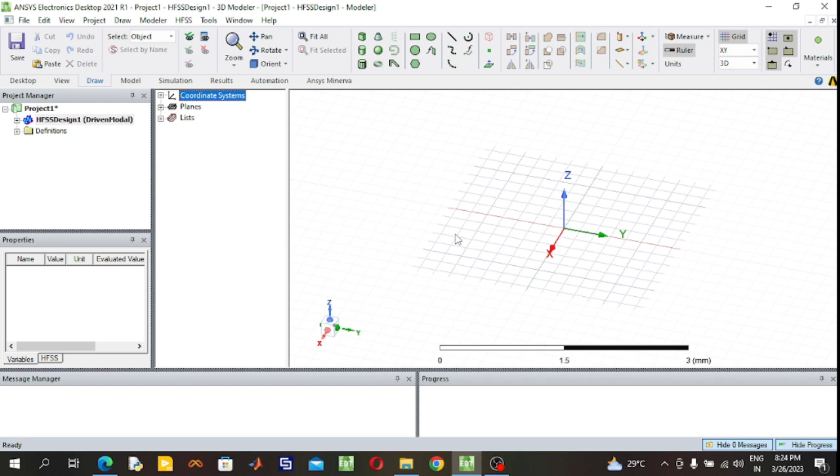In my previous videos, I already designed a half-wave dipole antenna at a 2.4 GHz operating frequency. Now in this video, I am going to design a folded dipole lambda by 2, folded half-wave dipole antenna design and simulation results.

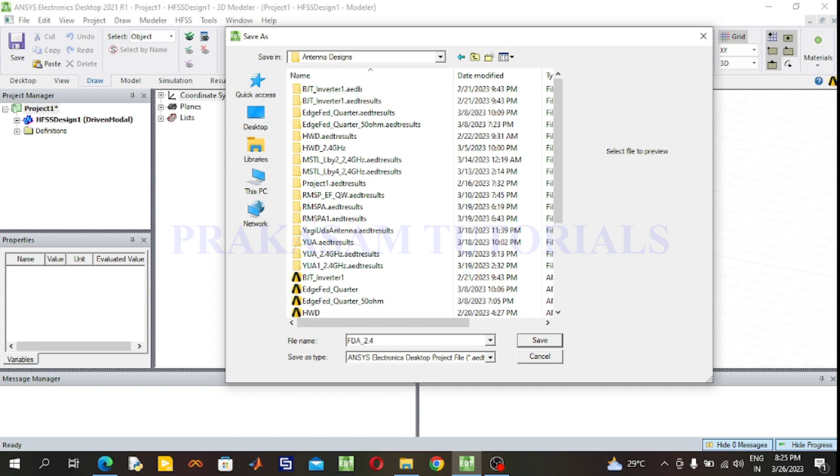First save the project: right click on the project, save as. Give the file name. Here my file name is FDA, folded dipole antenna underscore 2.4 gigahertz. So this is my file name. So my project is successfully saved.

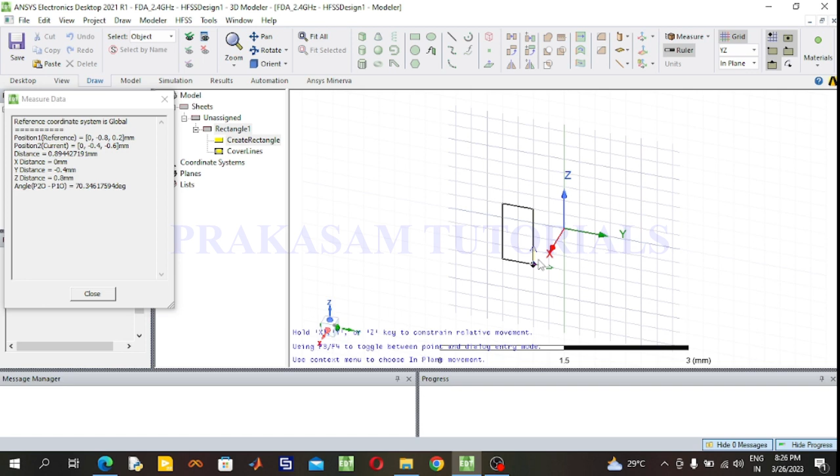So first select the YZ plane. First draw the rectangular port. Select the rectangular sheet. Draw the rectangular sheet in the plane. Give the dimensions of the rectangular sheet and rename the rectangle to port, and change the dimensions of the rectangular sheet. The calculations of the half-wave dipole antenna were already explained in my

previous video. At 2.4 GHz operating frequency, the wavelength is 125 mm and lambda by 2 is 62.5 mm, and upper radiating element length is 31.25 mm, and radius of the dipole is lambda by 120. So lambda by 120 is 1.04 mm.

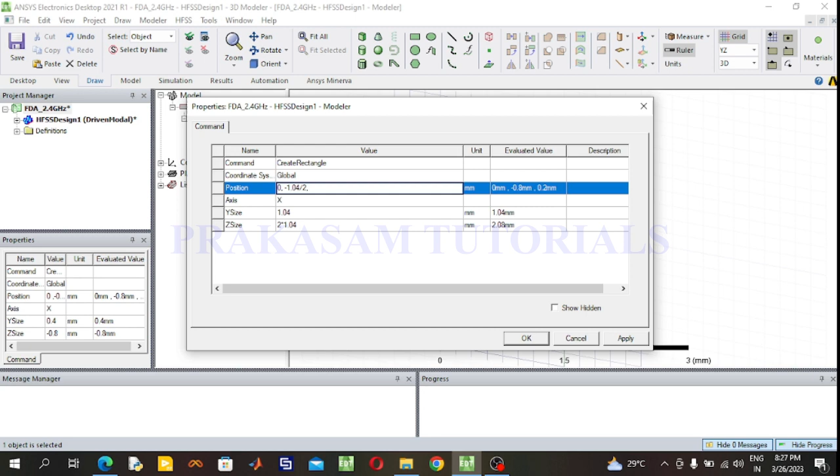So Y size is 1.04 mm, that is the dipole radius, and Z size is the gap, 2 times the dipole radius. X position is 0, Y position is half of the Y size value, minus 1.04 by 2, and Z position is half of the Z size value, minus 1.04 mm. So click the OK button. So this is the rectangular port.

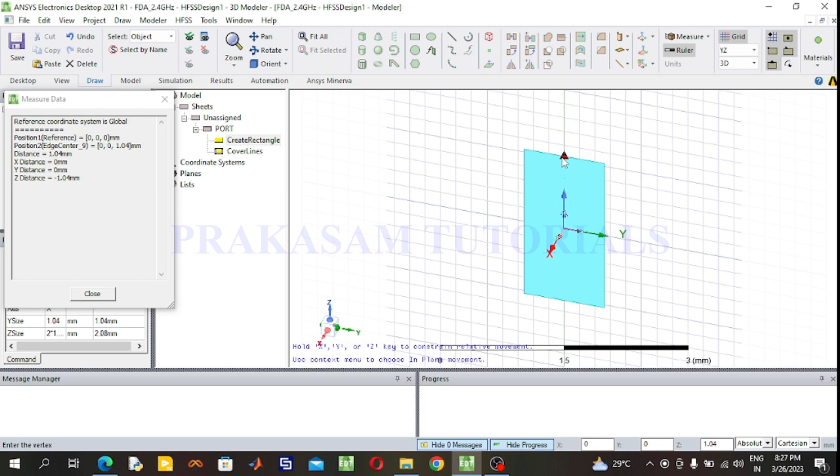Next select the line, draw the line from the upper port to the lower port. This is the rectangular port, this is the upper port, this is the lower port. Click on the upper port, move the mouse upward, click that position, move the mouse horizontally and click this position. Move the mouse downward, click this position, move the mouse leftward, click this position and move the mouse to the lower port of the rectangle. Double click on that position.

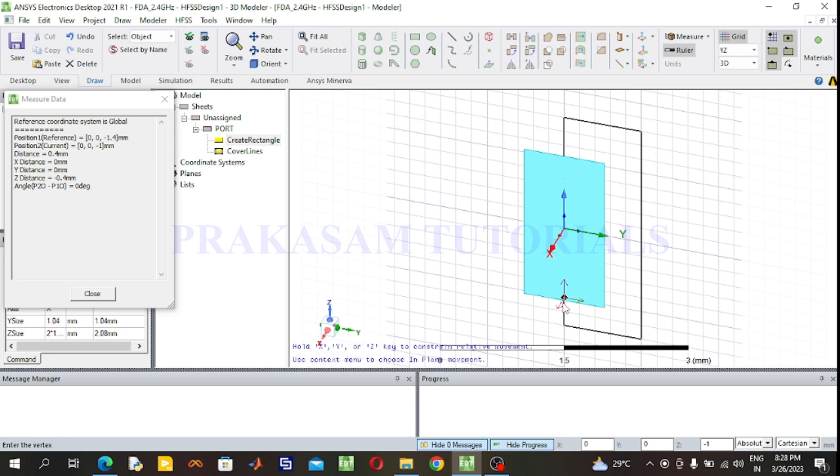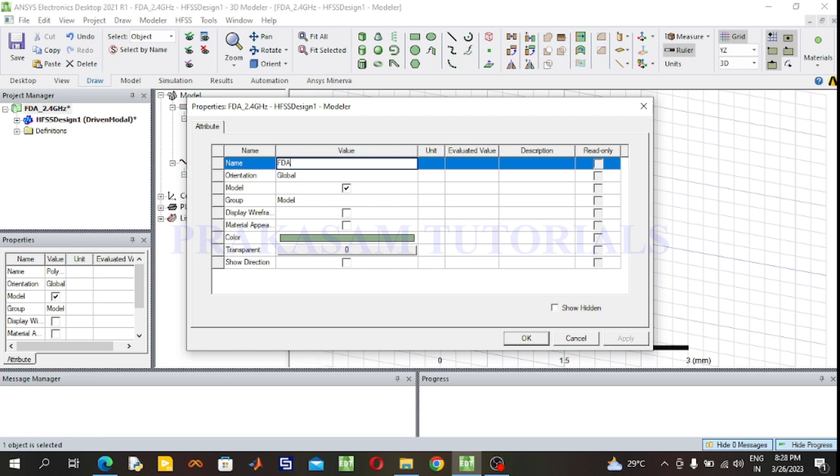So this is the line. After that, rename polyline 1: double click on polyline 1 and rename it FDA, folded dipole antenna. Next change the dimensions of the antenna. This is create line 1, create line 2, create line 3, create line 4, and create line 5.

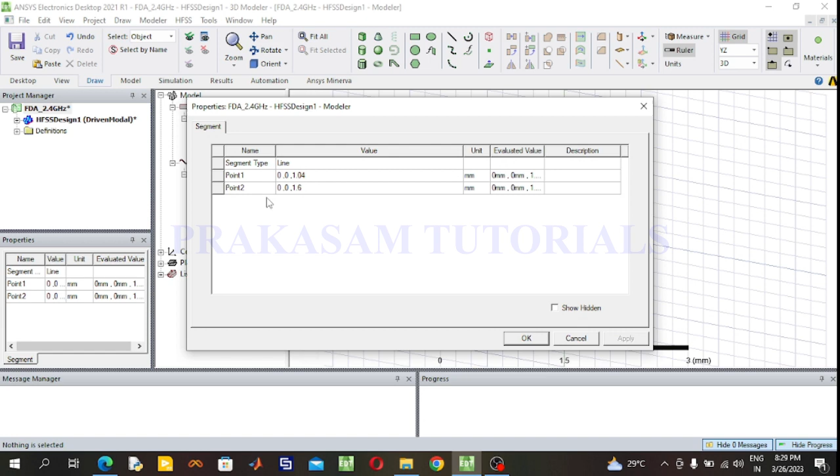Now change the dimensions of create line 1 to create line 5. Double click on create line 1. This is point 1, this is point 2. The height of the rectangular port is 1.04, gap is 2 times 1.04, and from origin to this height is 1.04. So point 1 is 0, 0, 1.04, and point 2 is 0, 0, height of the dipole.

At 2.4 gigahertz operating frequency, the wavelength is 125 mm, and lambda by 2 is 125 by 2, 62.5 mm. Upper radiating element length is lambda by 4, so 125 mm by 4 is 31.25 mm, subtracting the gap: lambda by 4 minus gap. Gap value is 2 into 1.04. So 29.1 mm is the upper radiating element length.

So now point 2 is 0, 0, upper radiating element length 29.1 mm minus 1.04 mm. Press the OK button. Those are the create line 1 dimensions. Next change the dimensions of create line 2. Double click on create line 2. Point 1 dimensions are 0, 0, 29.1 minus 1.04 mm, and point 2 dimensions are,

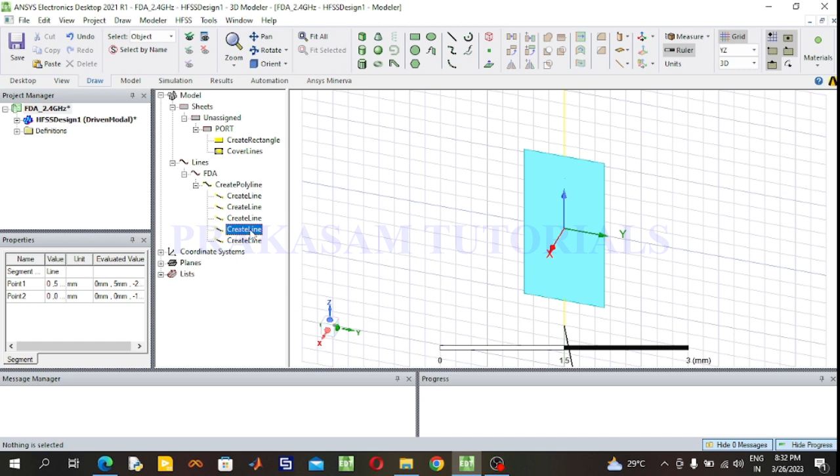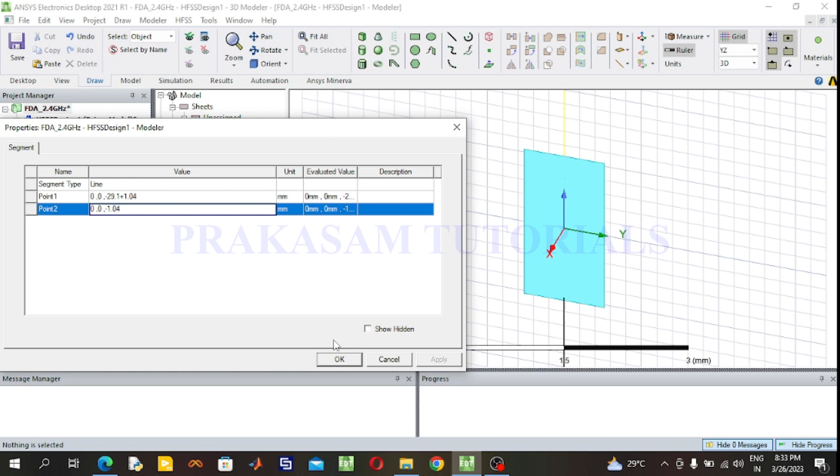Next change the dimensions of create line 4. Double click on create line 4. Point 1 dimensions are 0, 5, minus 29.1 plus 1.04, and point 2 dimensions are 0, 0, minus 29.1 plus 1.04 mm. Press the OK button. Next change the dimensions of create line 5. Double click on create line 5. Point 1 dimensions are 0, 0, minus 29.1 plus 1.04 mm, and point 2 dimensions are 0, 0, minus 1.04 mm. Press the OK button. So now select the FDA.

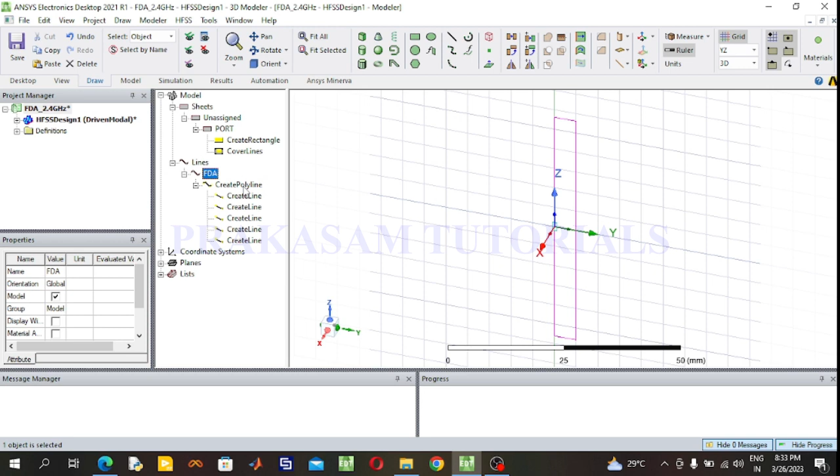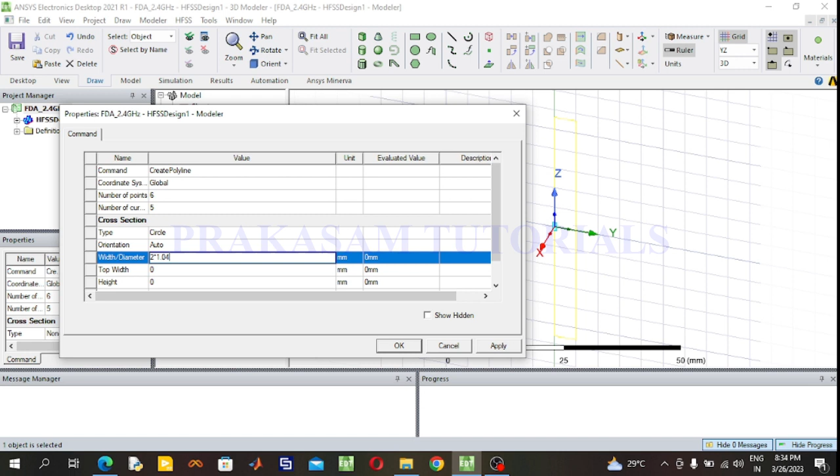This is the folded dipole antenna. So now change the width of the line. Double click on this create polyline. So now here the type is none. I am selecting the type as circular, and the width of the dipole is 2 times the dipole radius. So 2 into, now here the dipole radius is 1.04 mm,

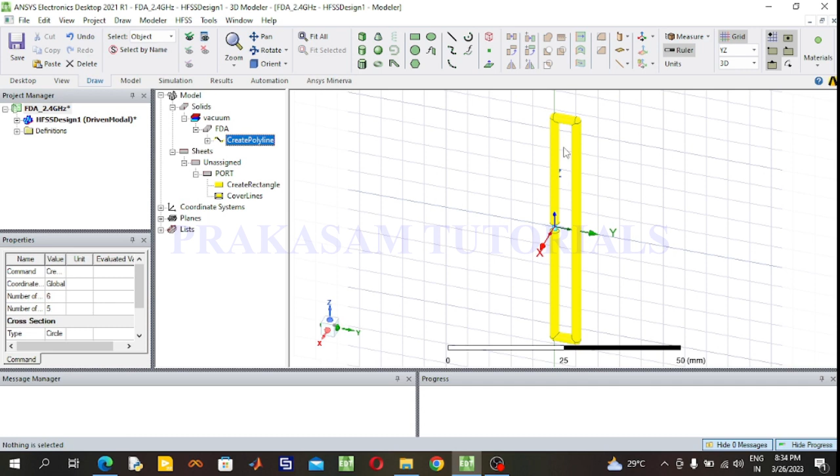and bend type is corner. I am selecting curved shape. Press the OK button. So this is the folded dipole antenna. So now change the type of the material. Double click on the FDA. Now here the material is vacuum. I am selecting PEC material, perfect electric conductor material. So press the OK button.

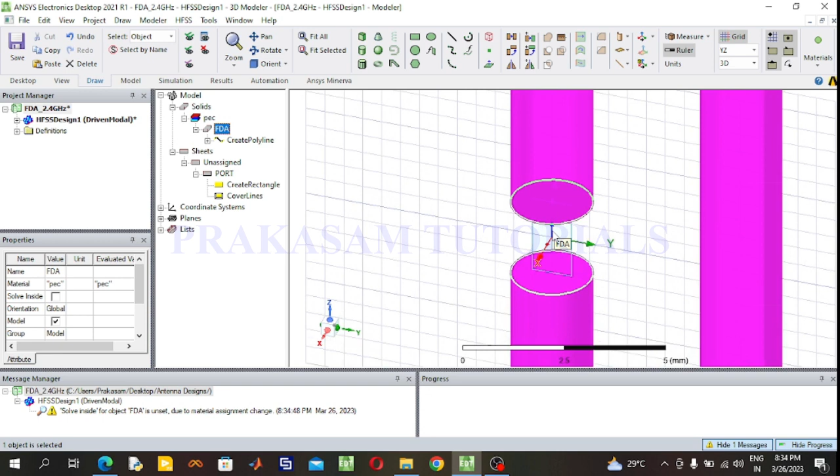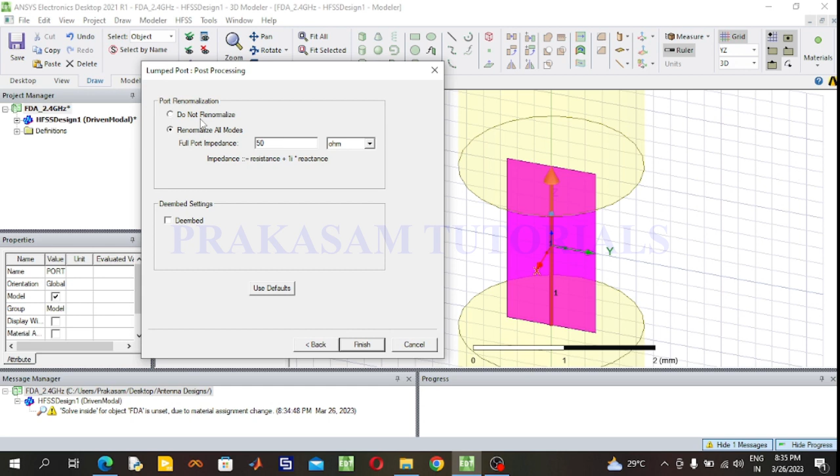So now assign the lumped port excitation. Select port, right click on the port, go to assign excitation, select lumped port, and the full port impedance of the folded dipole antenna is 300 ohms. Press the OK button. Draw the new line integration from lower port to the upper port. Press the OK button. Select Don't Renormalize. Press Finish button. So lumped port excitation is successfully assigned.

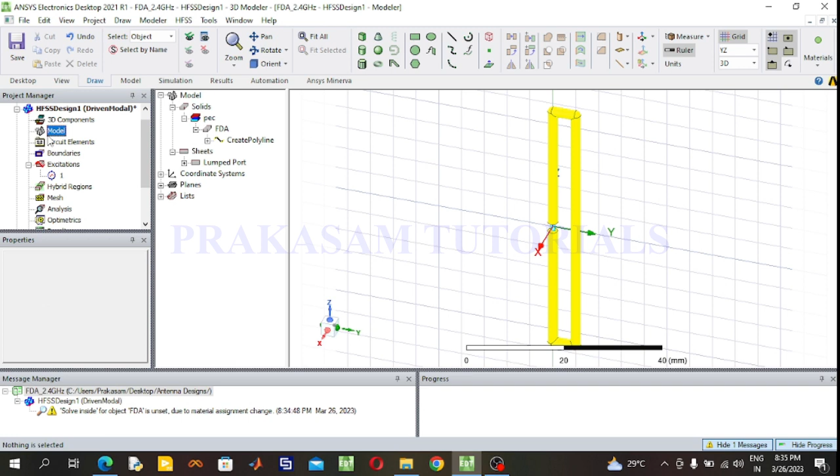Select the fit all. Now select the box, radiation box. So now here I am selecting open model. In the project manager, right click on the model, select create open region. Now here my operating frequency is 2.4 GHz. Type the operating frequency value, press the OK button, fit all. So this is the 3D structure of the folded dipole antenna.

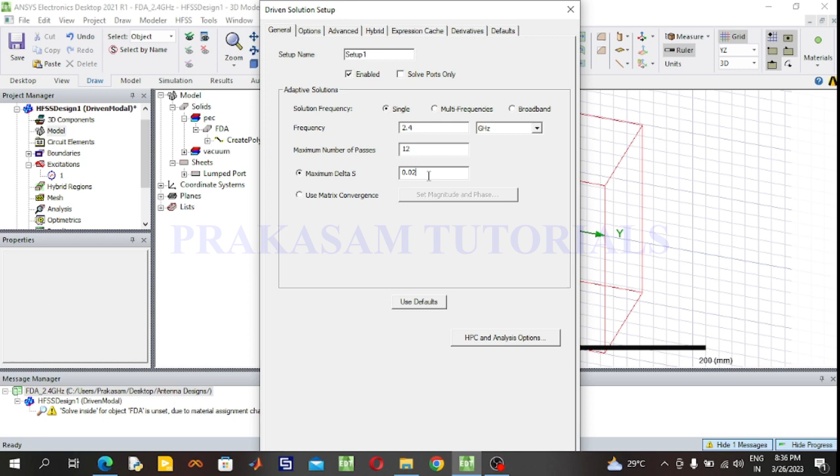Now set the analysis setup. Go to HFSS, analysis setup, add solution setup, select advanced. Now the operating frequency is 2.4 GHz. I am selecting maximum number of passes 12 and maximum delta S 0.02. So press the OK button, and the sweep type is fast, starting frequency is 1.2 GHz, ending frequency is 3.6 GHz and maximum number of points are 101. So press the OK button.

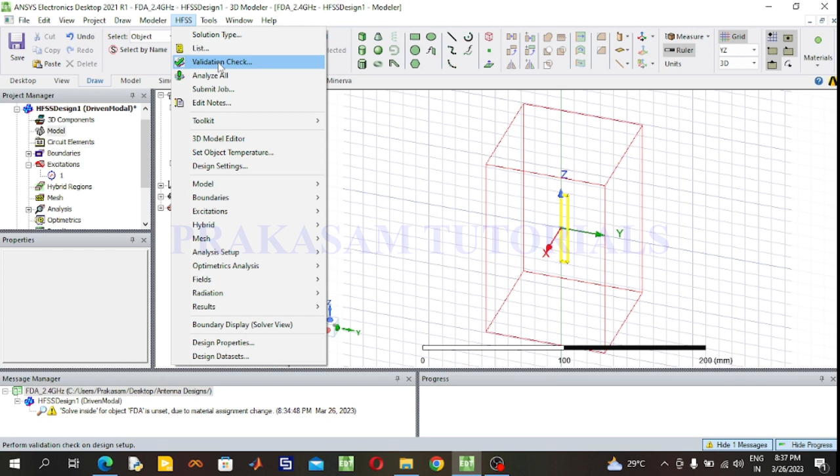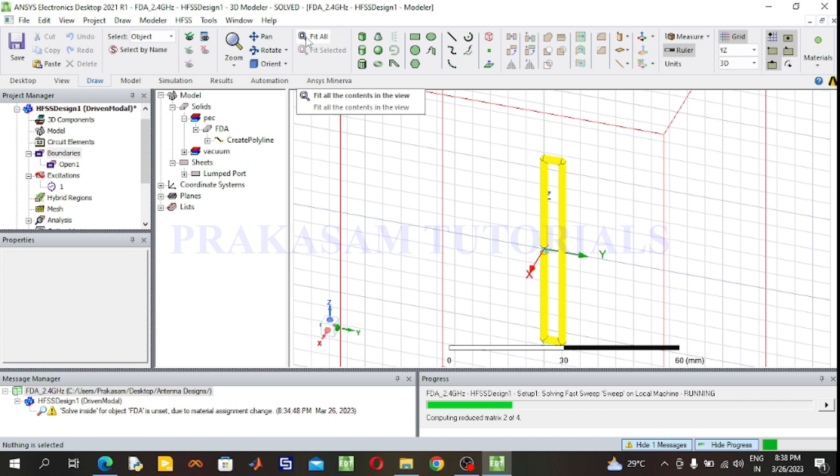Now check the validity. Go to HFSS, select validation check button. So design is successfully validated. Now start the simulation. Go to HFSS, select analyze all. Simulation is successfully completed. So now observe the results. First observe the S parameter value. Right click on the results. Create modal solution data report. Select rectangular plot, S parameter S11 in decibel. Click the new report.

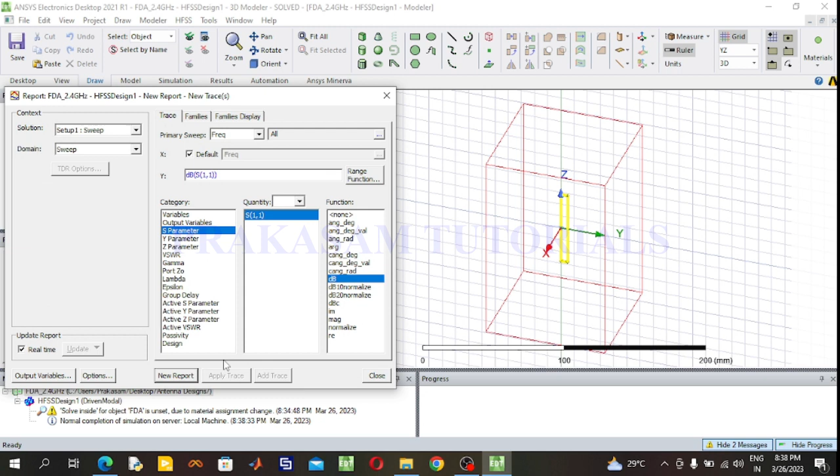So mark the designated operating frequency. My designated operating frequency is 2.4 GHz. At 2.4 GHz, the return loss value is minus 21.84 decibel. I will slightly change the height of the dipole so we will get a minimum return loss value. Now here the upper radiating dipole element length is 29.1 mm. I am changing the height of the upper radiating dipole element to 28 mm.

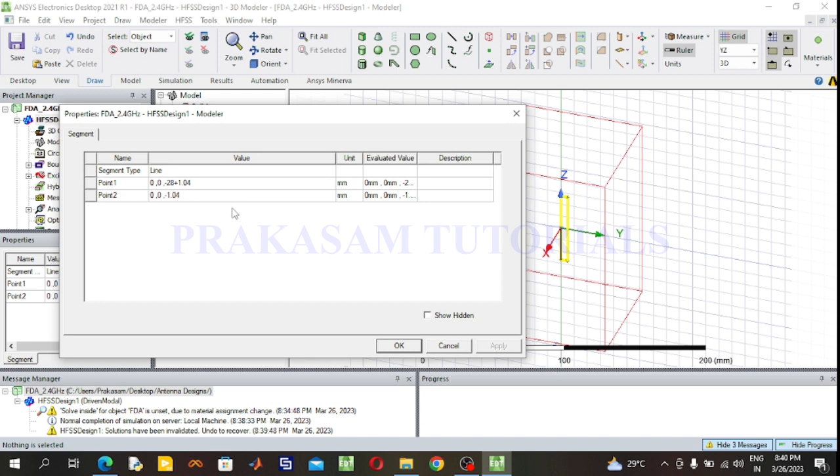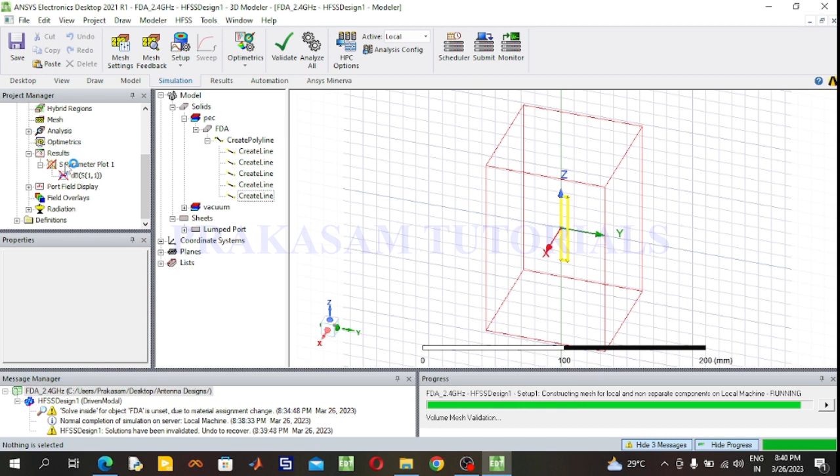So height of the dipole is changed. Now check the validity. Validate. So design is successfully validated. Now start the simulation. Click the analyze all button. So the S parameter value is updated. At 2.4 GHz operating frequency, the return loss value is minus 29.2426 decibel. This is a very good value. The folded dipole antenna at 2.4 GHz operating frequency is successfully designed.

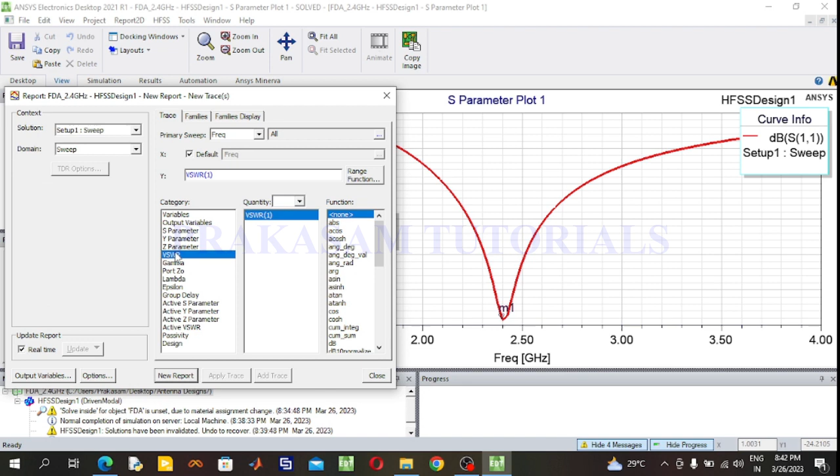Next, observe the VSWR value. Right click on the result. Create modal solution data report. Select the rectangular plot and select VSWR. Click the new report. So mark the designated operating frequency 2.4 GHz. At 2.4 GHz operating frequency, the VSWR value is 1.0715. So this is an excellent value.

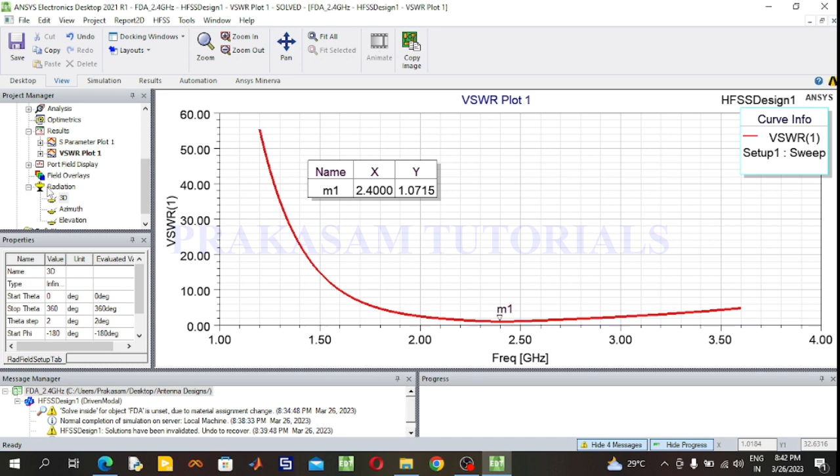Next, observe the far field results. So now here the 3D infinite sphere. Phi value is minus 180 to plus 180 and theta value I am selecting 360. Go to the results, right click on the results, go to create far fields report, select the radiation pattern and select the gain in decibel, select the family of the phi values. The family of phi values are all values, meaning minus 180 to plus 180.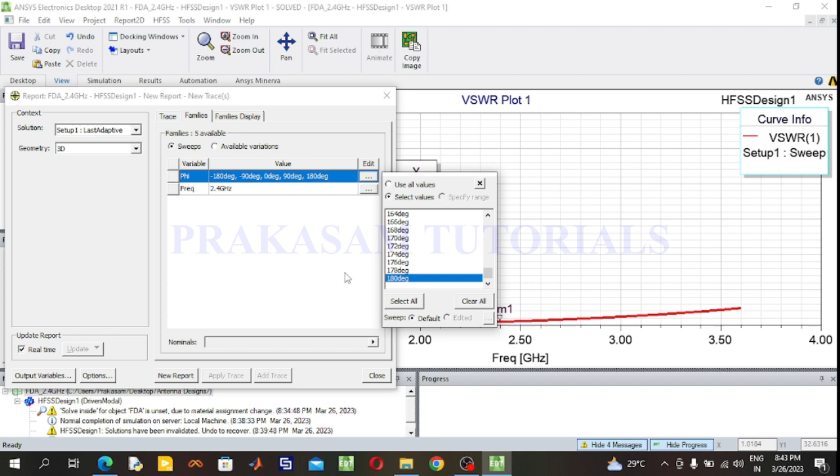Now here I am selecting the family of values minus 180, minus 90 degrees, 0 degrees, plus 90 degrees, plus 180 degrees. Click the new report. So this is the two-dimensional gain radiation pattern.

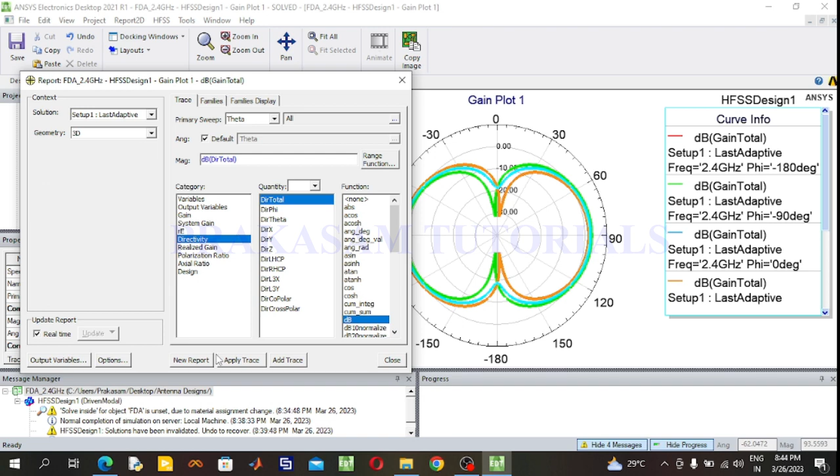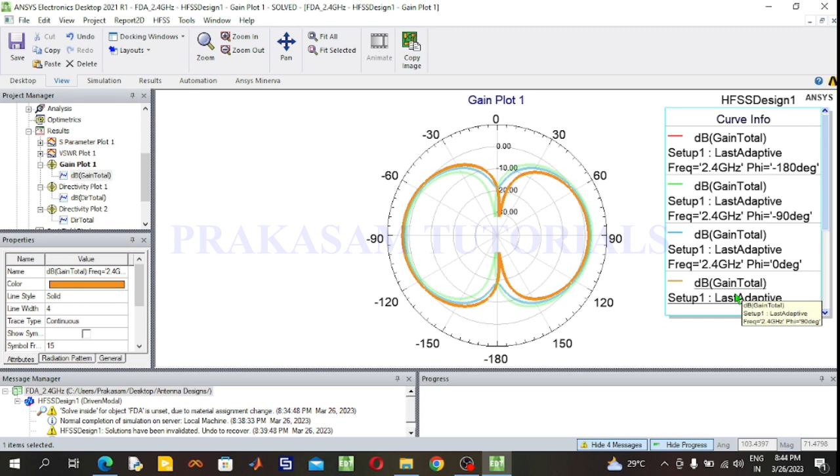Next, select the directivity 2D radiation pattern in decibel. Click the new report. So this is the two-dimensional directivity radiation pattern. Now observe the directivity radiation pattern without decibel. So this is the radiation pattern without decibel. So minus 180 degrees, minus 90 degrees, 0 degrees, 90 degrees, plus 180 degrees.

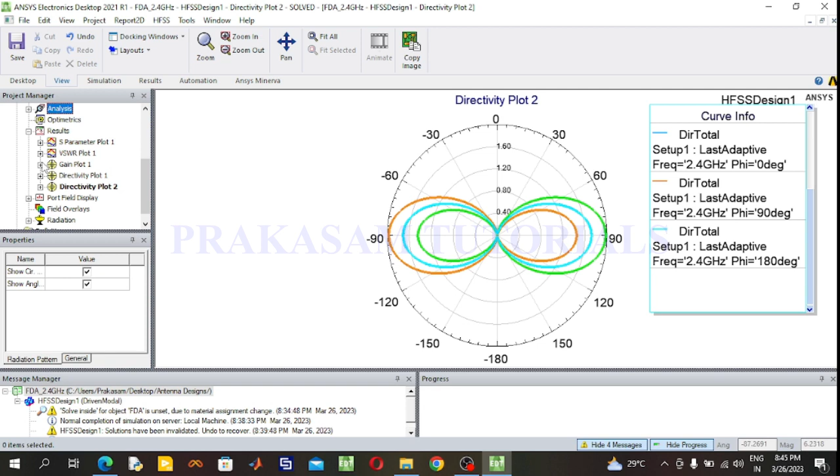Next, observe the 3D polar plot. Go to the results, right click on the results, go to create far fields report, select 3D polar plot. So gain in decibel, click the new report. So this is the gain 3D polar plot. The gain value is 3.0. So this is a very good value.

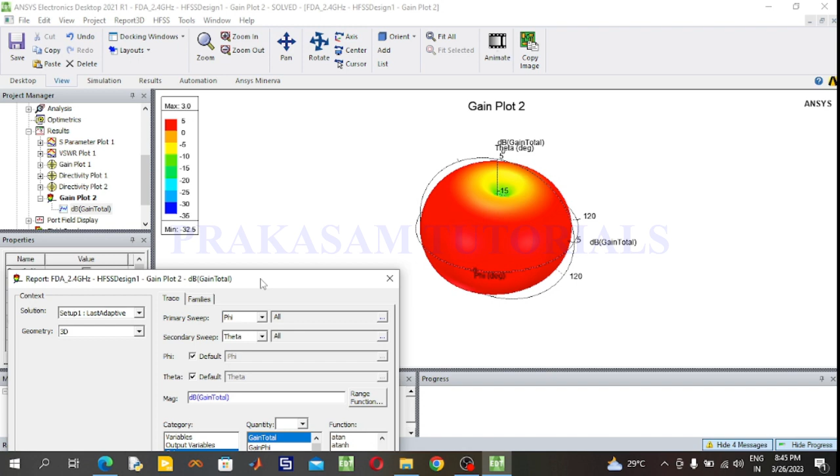Next, observe the 3D polar plot directivity. Select the directivity in decibel, click the new report. So now the 3D polar plot directivity is 3. So gain is 3 decibel, directivity is 3 decibel. This is a very good value.

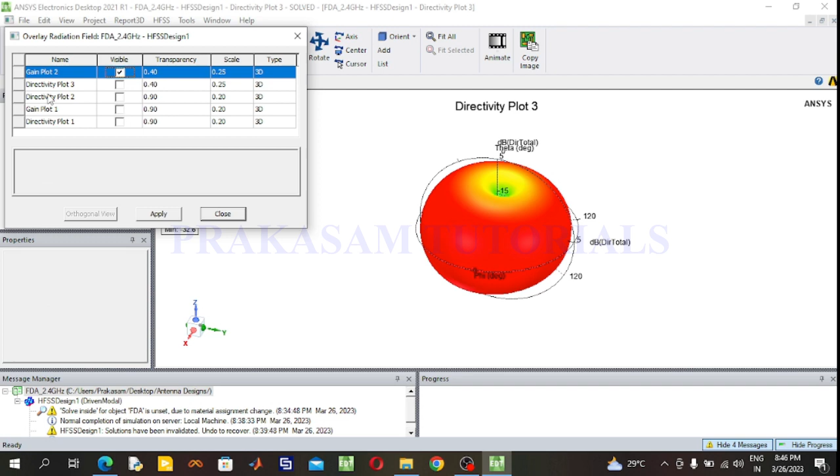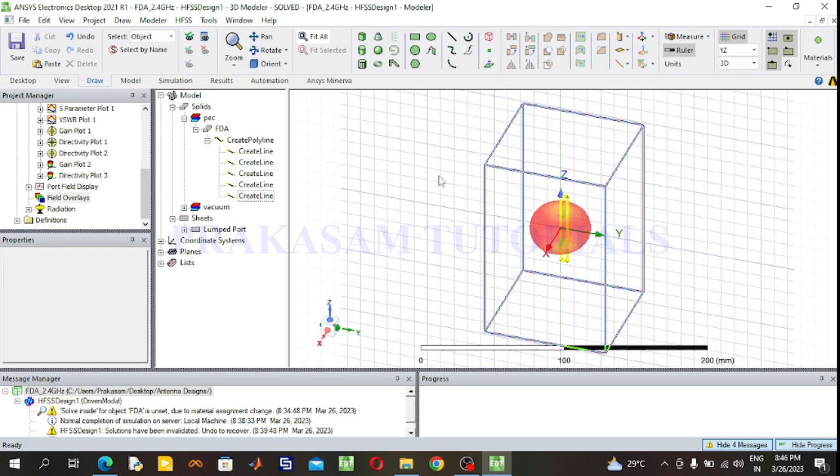So next, observe the structure with radiation pattern 3D polar plot. Go to the field overlays, right click on the field overlays, select the radiation field, click the gain plot or directivity plot. Now here I am selecting the gain plot, apply. So this is the structure with 3D polar plot.

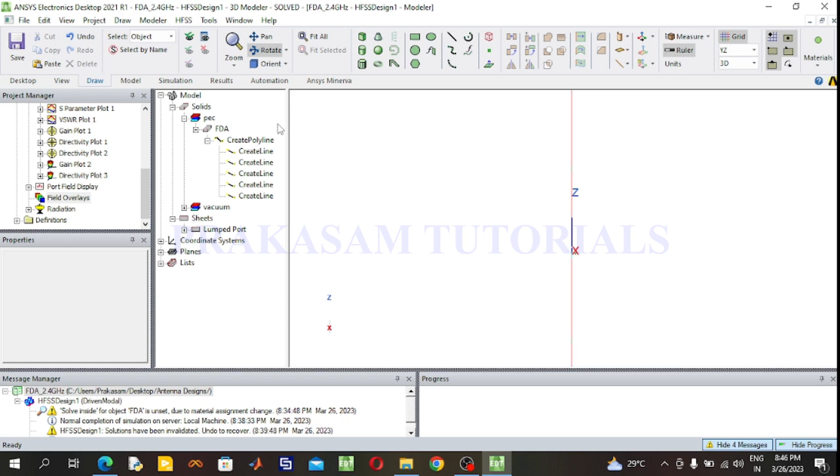And this is the top view, bottom view, right view, left view, front view.